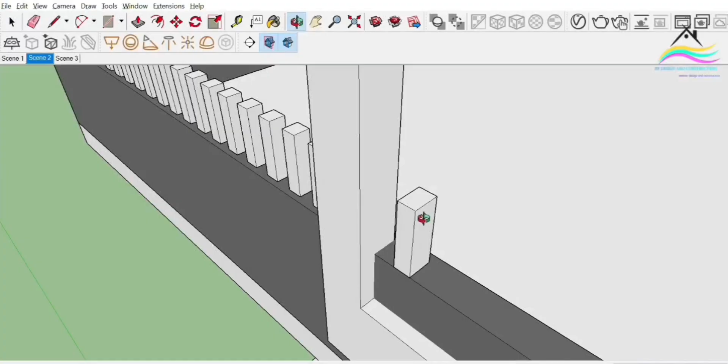Planter boxes soften the appearance of parapet walls, adding greenery to rooftops, terraces, or balconies and enhancing overall architectural appeal. They also help reduce the urban heat island effect by increasing green cover and can contribute to better air quality.

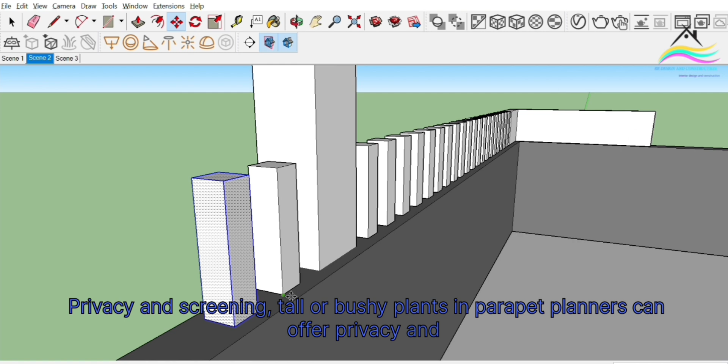Privacy and screening: tall or bushy plants in parapet planters can offer privacy and serve as wind or sun screens. Rainwater management: with proper design, these planters can support stormwater retention and filtration.

Design considerations - structural integrity: parapet walls must be structurally capable of supporting the added weight of soil, water, and plants. Reinforcement may be needed.

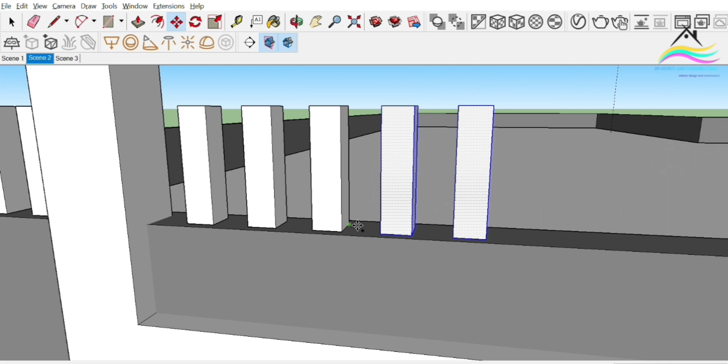Waterproofing and drainage are essential to prevent water seepage into the structure and avoid plant root rot. Common materials include concrete, brick, metal, or fiberglass-lined boxes, often integrated seamlessly into the wall design. Adequate access should be provided for watering, pruning, and general upkeep.

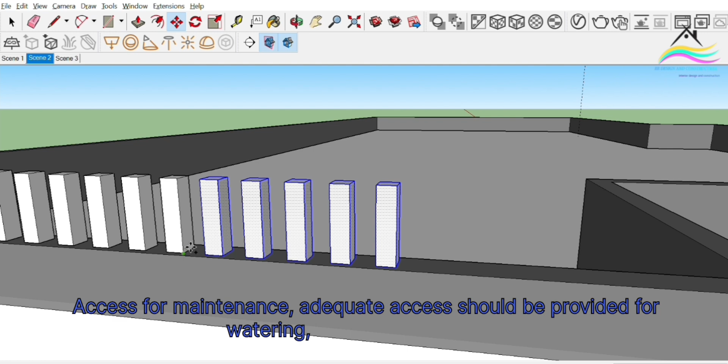Construction tips - slope and drainage: include a slight slope and drain outlets to direct excess water away from structural elements. Waterproof membrane: use high-quality waterproofing materials such as bituminous membranes or EPDM liners inside the planter.

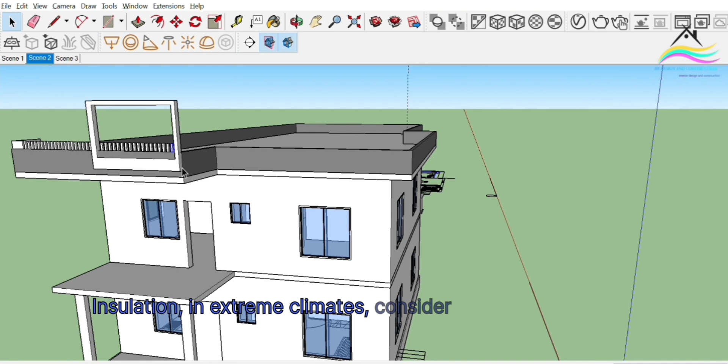Insulation: in extreme climates, consider thermal insulation to protect plant roots from excessive heat or cold. Root barriers: install root barriers to prevent root intrusion into wall structures.

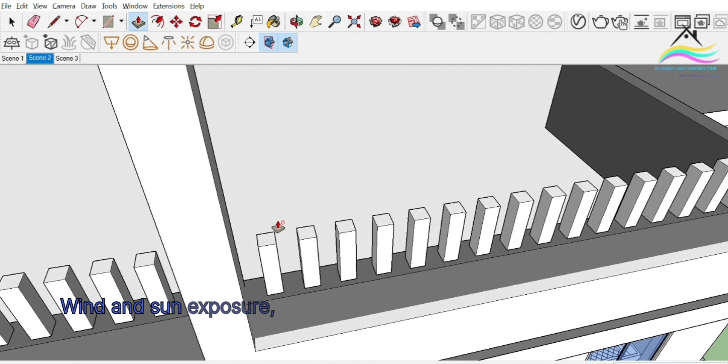Plant selection - low maintenance: opt for drought-tolerant and low-maintenance species suitable for rooftop or elevated environments. Wind and sun exposure: choose plants that can tolerate exposure to strong winds and direct sunlight, depending on location.

Weight considerations: lightweight potting mixes and plants with shallow root systems reduce structural load.

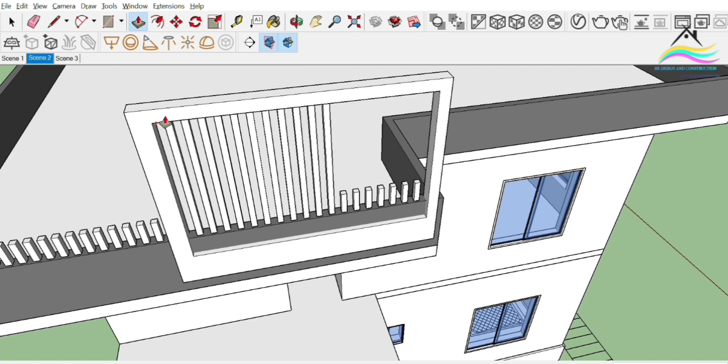Applications - residential buildings: commonly used on balconies and terraces to create green spaces in urban homes. Commercial properties: enhance the visual appeal of office rooftops or public terraces. Green roof systems: planter boxes can be a component of broader green roof strategies aimed at sustainability and energy efficiency.

Planter boxes in parapet walls combine beauty with functionality, offering a sustainable and stylish way to integrate greenery into architectural spaces. Proper design and execution are essential to ensure durability, plant health, and long-term performance.

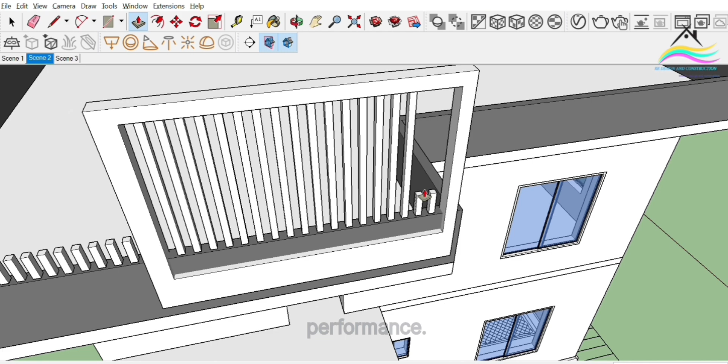Jali or lattice work, an artistic and architectural tradition. Introduction: Jolly, also known as lattice work, is a traditional perforated design carved into stone, wood, or other materials, forming intricate patterns of geometric and floral motifs.

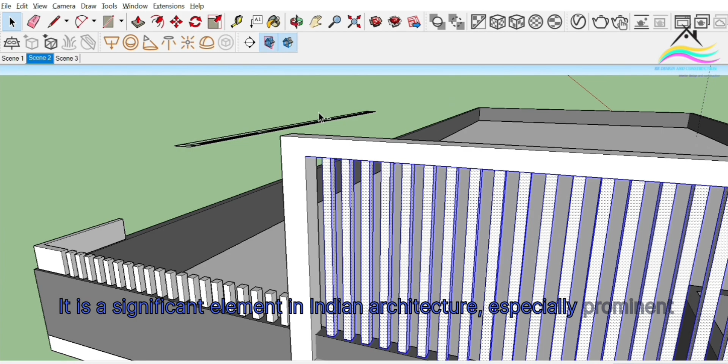It is a significant element in Indian architecture, especially prominent in Islamic, Mughal, and Indo-Saracenic styles. Beyond its decorative appeal, Jolly work serves both functional and symbolic purposes in architecture.

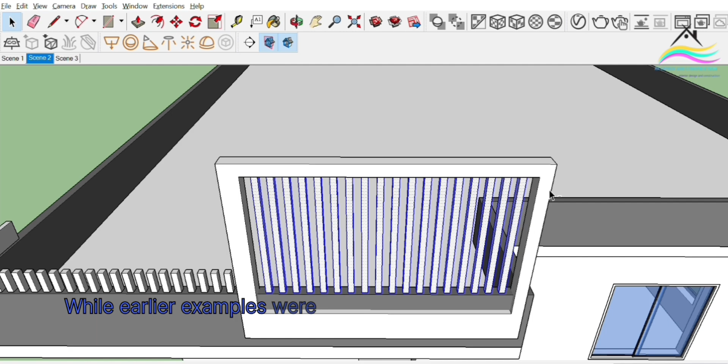Historical origins and evolution: the use of Jolly dates back to ancient Indian temples and was later refined during the medieval period, particularly under Mughal patronage. While earlier examples were simpler in form, the Mughal era saw the rise of highly elaborate and symmetrical Jolly designs, often cut from marble or red sandstone.

Iconic examples include the Jollies in the Taj Mahal, Fatehpur Sikri, and various tombs and mosques across the Indian subcontinent.

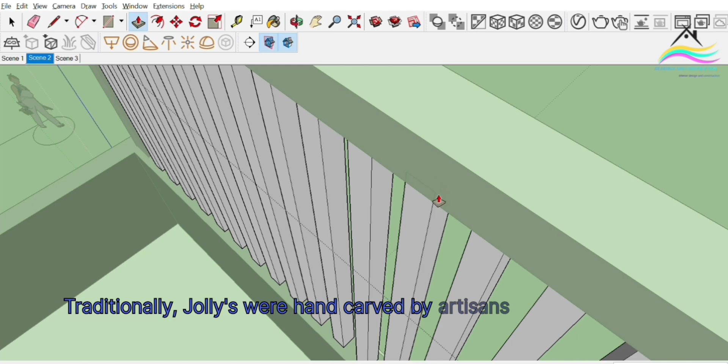Materials and techniques: traditionally, Jollies were hand-carved by artisans using chisels and hammers. Common materials included stone, like marble, sandstone, or granite; wood, especially teak or rosewood in temples and homes; and metal, in gates, screens, or furniture.

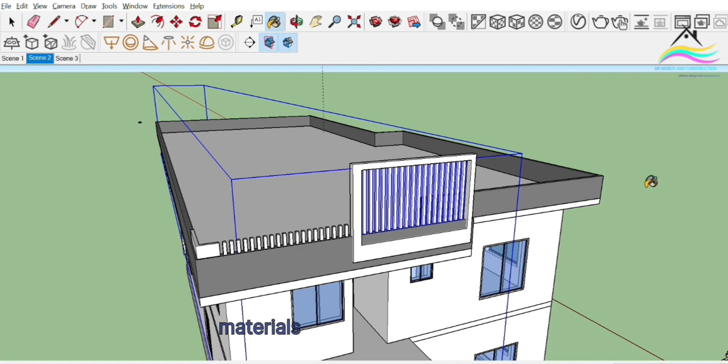Modern Jolly work may also use CNC machines, laser cutting, and other industrial methods on materials like MDF, steel, or PVC. Functions and symbolism: Jollies are not merely decorative, they are a sophisticated response to environmental, social, and spiritual needs.

Ventilation and cooling: the perforated screens allow air circulation while reducing heat and glare, creating a natural cooling system well suited for hot climates.

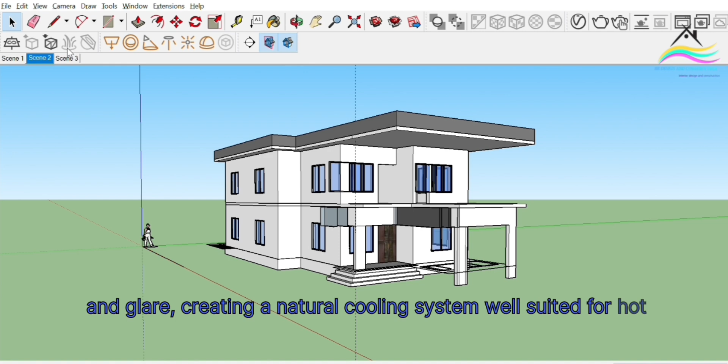Privacy: in Islamic architecture, jollies provided privacy without completely blocking views or light, especially in harem quarters.

Light filtration: the interplay of light and shadow through jollies adds a poetic dimension to architectural spaces, often seen as symbolic of the divine.

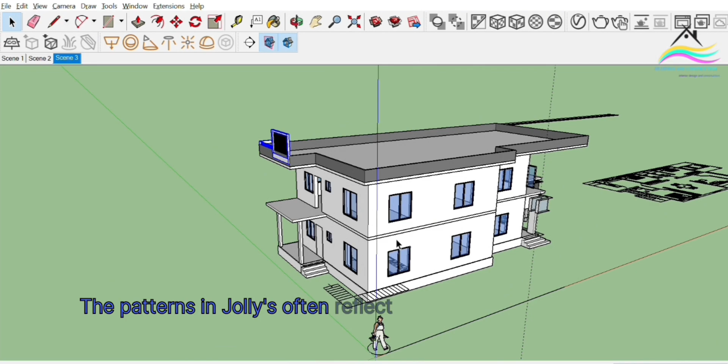Cultural expression: the patterns in jollies often reflect religious and cultural values. Geometric patterns in Islamic art symbolize the infinite nature of Allah, while floral motifs signify beauty and paradise.

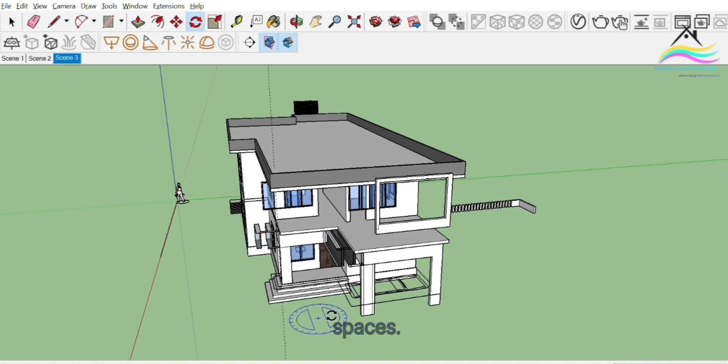Contemporary use: today, jali work continues to inspire architects and designers. It is used in both traditional and modern buildings, homes, hotels, restaurants, and public spaces. With advancements in materials and technology, designers are now reimagining jali work for facades, partitions, furniture, and even fashion accessories.

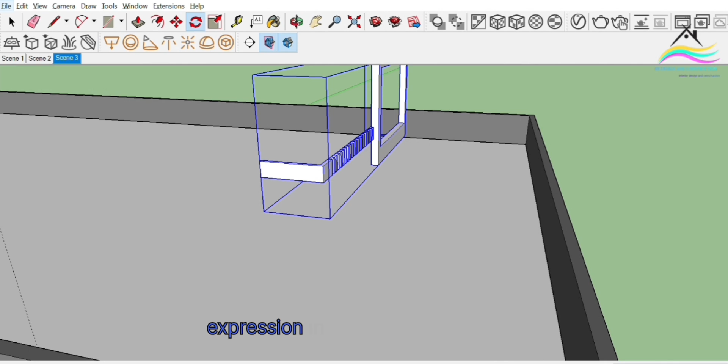Conclusion: Jali or lattice work is a brilliant fusion of art, science, and spirituality. It demonstrates the ingenuity of traditional artisans while remaining a dynamic form of expression in contemporary design. Its enduring appeal lies in its ability to blend aesthetics with utility, making it a timeless feature in global architecture.

Lighting features for parapet walls. Parapet walls, which extend above the roofline or terrace edge, not only serve as safety barriers but also offer an excellent opportunity to incorporate lighting features that enhance both functionality and aesthetics.

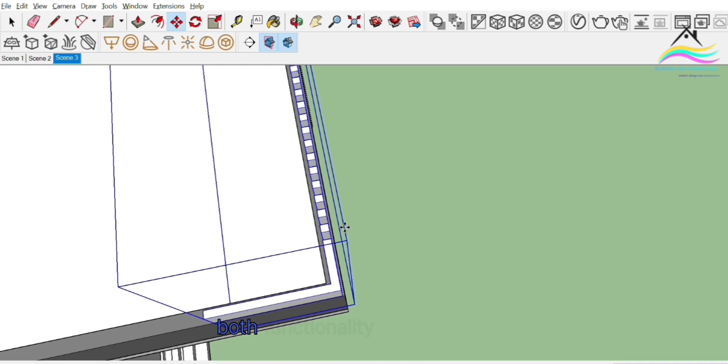Safety and security lighting - pathway illumination: lighting along parapet walls can illuminate rooftop pathways or terraces, ensuring safe movement at night. Perimeter security: installing lights on or near parapet walls helps deter intruders by illuminating vulnerable access points on rooftops.

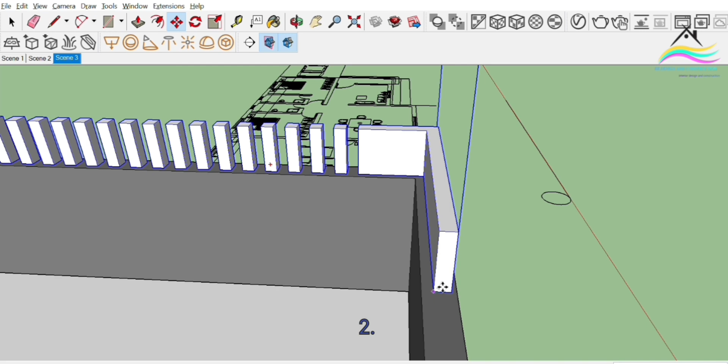Accent and decorative lighting - wall wash lighting: fixtures placed at the base or top of the parapet can cast a soft wash of light over the wall's surface, highlighting textures, materials, or decorative elements like jali lattice work.

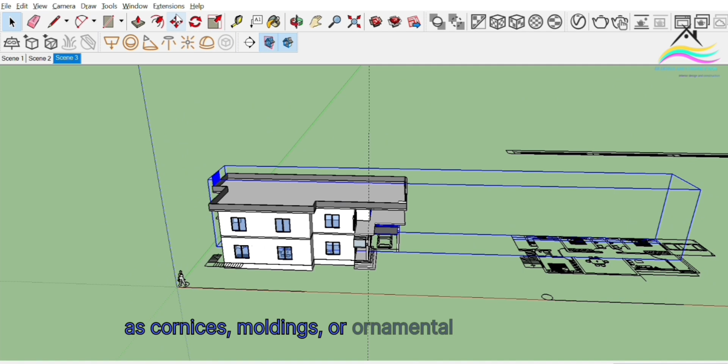Spotlights and uplights: directed beams can emphasize architectural details, such as cornices, moldings, or ornamental parapet designs. LED strip lights: flexible LED strips can be concealed along the parapet edges to create a subtle, continuous glow, giving a modern and sleek outline effect.

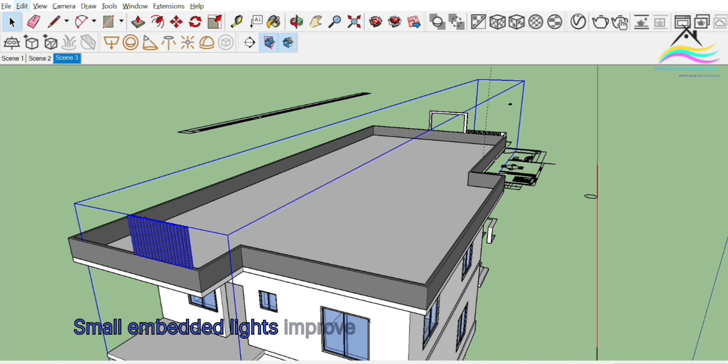Functional lighting - step and edge lighting: for parapets with integrated planter boxes, steps, or seating, small embedded lights improve usability and reduce trip hazards. Solar-powered fixtures are often used on parapet walls to save energy and simplify installation without requiring wiring.

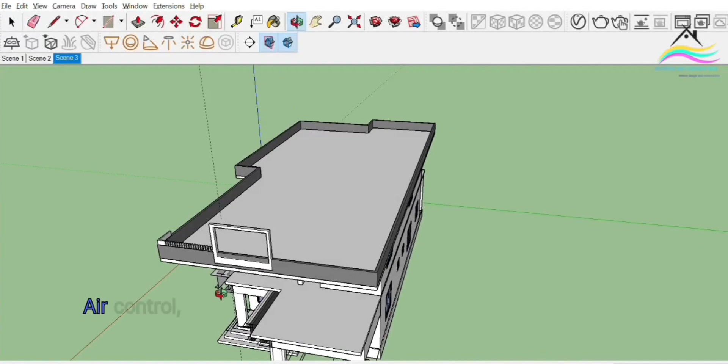Design considerations - weatherproof fixtures: lighting used outdoors on parapets must be waterproof and durable to withstand exposure to sun, rain, and wind. Glare control: fixtures should be positioned or shielded to prevent glare that could disturb residents or neighbors.